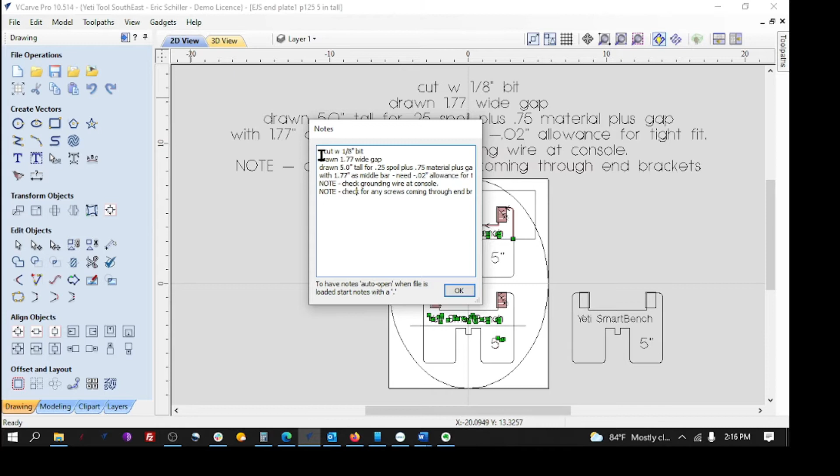Think of a shop where I may be doing the design work, but I may have somebody else pop open the drawing and toolpath it, or take the toolpaths that I've already determined and save them to the machine, and they're doing it separately from me, and I may not be there to talk to. So these pop-up notes are great. You just start the note section with a dot, a period in the first character space, and this will pop up automatically.

You may wonder what these are. These are the toolpath starts and stops. So if I come over to the toolpath side and turn off toolpaths, they're gone. So I often write a lot of extra information around here so that if somebody else is looking at the drawing, they can see what they want to do. So in this case, we're going to work with this.

This is one vector all the way around, and I want to take this and break it. I think what I did with Johnny, my customer, was I had done a line and broke it and things like that. None of that is necessary. So I'm going to work just from the finished setup. My 5 inches was measuring from here to here. So this is all one vector. I'm going to hit the right button and go to node mode, or I can hit N to go to node mode. I'm going to come in here, hit the right button, and cut the vector.

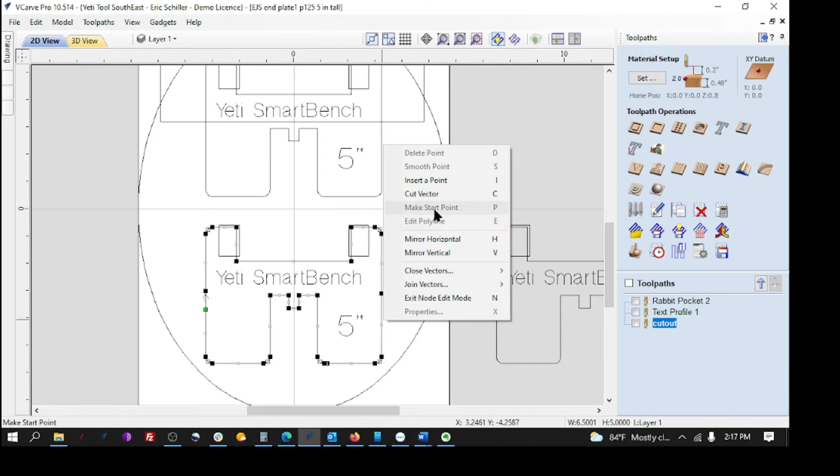And so now this has a different starting and end point. I'm going to come over to this side and hit, I don't care where, and cut the vector again. So now this is two different vectors, the one that does the top of it, and then the one that comes from this endpoint to this endpoint. Okay? So now what I want to do is I'll move the bottom of it a certain amount back down.

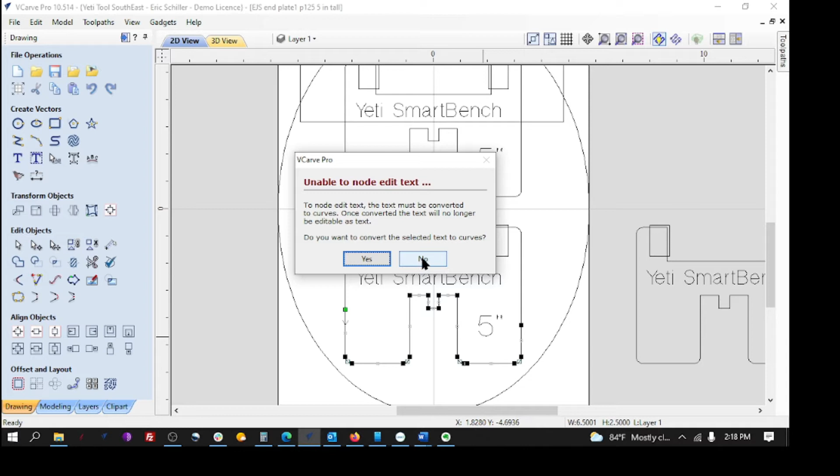I'm in the design side, so I need to be working over here. So I would go to the move command, which is transform objects, and then this is move selected objects. It's just that one lower vector. Actually, if I wanted to do this right, I could do this as well, but I'm going to get out of node mode. So I'm just going to hit the right button and close node mode by hitting N. So I want to take this text and this and move it in the Y direction -1 inch.

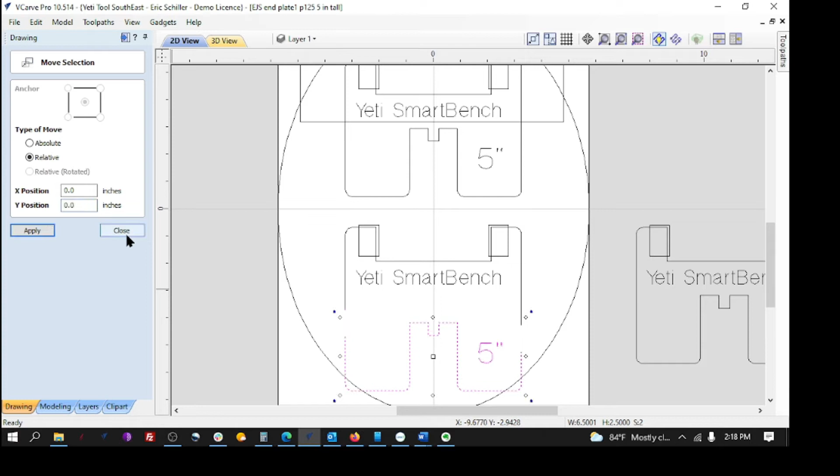So that drops it down, and then I'm going to go into node mode again. I can hit the right button and go to node mode, or once I have the vector selected, I can hit N, and I'm just going to take this and drag it up and drag it up, and then we would have to join those to make it one contiguous line. So if I select this vector and this vector, it's two different vectors, and after I work it out, it'll just be one, and that's what we want.

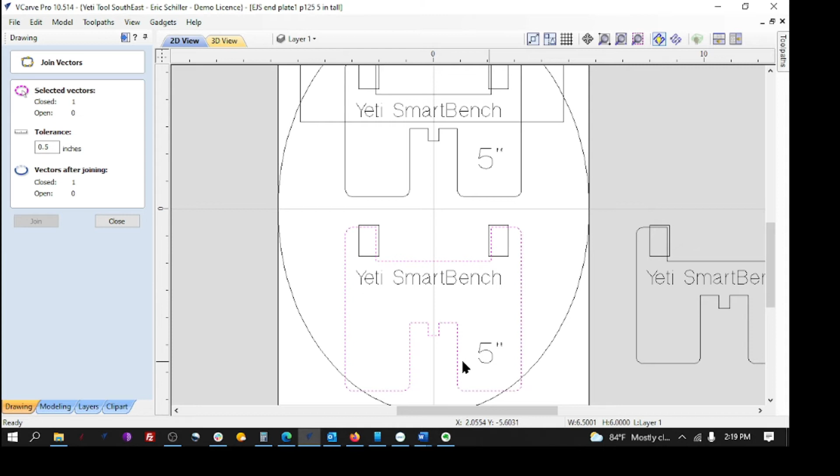Then I'm going to come in and edit the text. So that was 5 inches. I added an inch. Go to the text, and I'll change it to 6 inches. And there is my new size. I'll take this one, all of it, and delete it. I don't need this box either. I was probably showing another customer things.

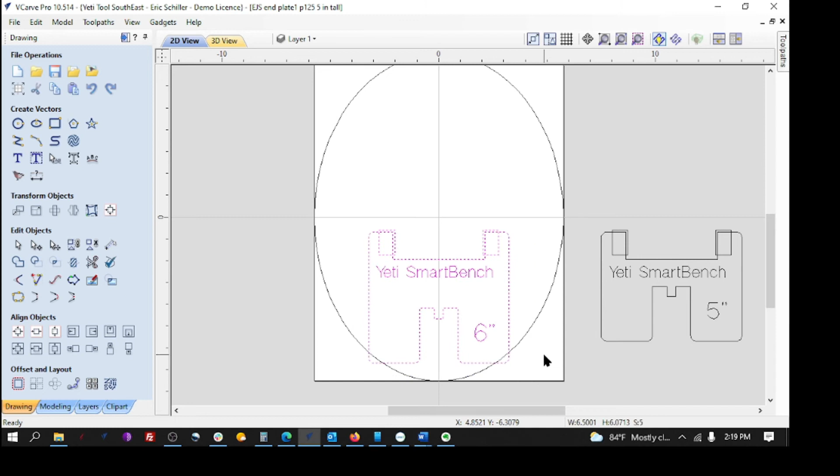So I'll take this one, I'm going to nudge it up with the arrow keys, and that'll fit. And I'll take this, all of it, and do Control-C to copy, Control-V to paste, and it pasted it right on top of itself, and then I'm going to move it up. Now, I had designed this with a 1/8 inch bit, so that will work.

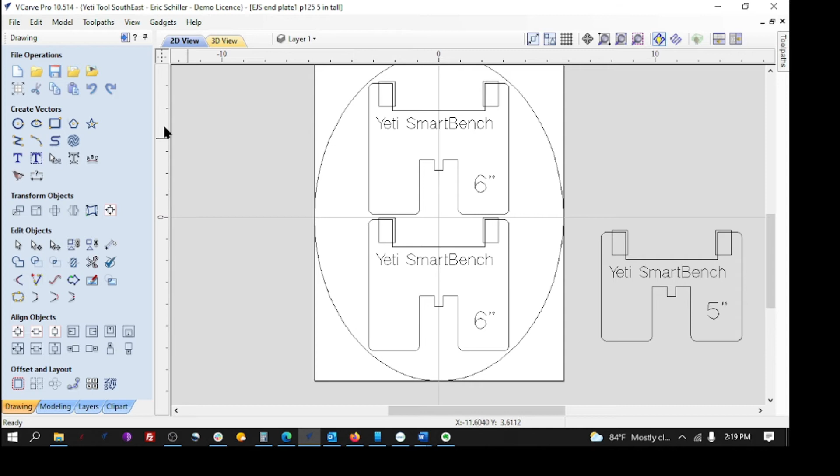It'll still pocket these out for the screw. There's a screw on my machine right here that this needs to be pocketed out a bit, and there we are. So then I would go to File, Save As, and give it a new file name, because rather than a 5 inch tall, it's now 6 inches tall. And save it and go back into the toolpathing and the rabbit for the pocket, and I'll just add that to the other pockets that I copied it, tell it OK, and calculate.

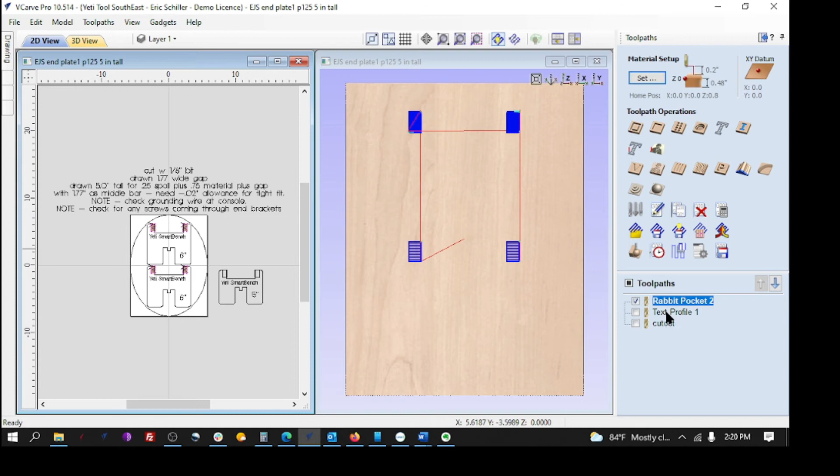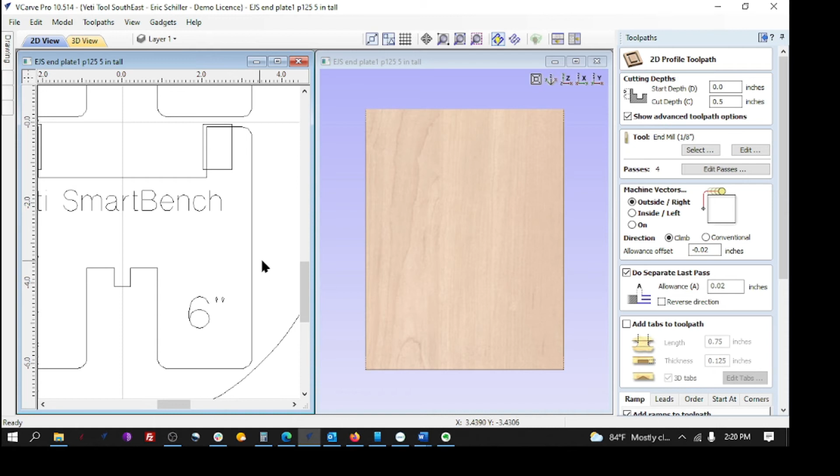And then I'll go to the next one, the text profile. That's for there and here and here, and calculate. And then the cutout itself. Click, click, and that is, sorry, I'm looking at what I've done here. Turn off. So the cutout itself, click, click. I don't know what I did. I may have turned it off by mistake. So there, now that's going to work.

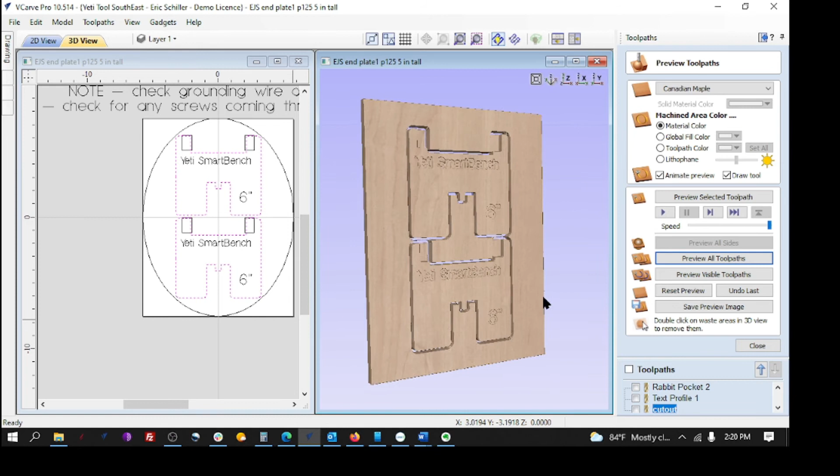And calculate. And it's warning us that it's going to punch through. My corian is 0.47 or 0.48. If I haven't surfaced my spoil board in a while and it may be standing a little proud, we're going to reset the preview, preview all, pocket, text, and there we go. Now, you'll probably want to add tabs to the profile cut, depending on how you're doing stuff, or you could be holding it down with CA glue and painter's tape. Again, how you machine this is all up to you, but this is a simple process.

Set up a variety of these. I probably have 6 or 7 different sizes, and I initially planned the 5-inch one for a 1/4-inch spoil board plus 3/4 material plus gap. That gave me roughly 5 inches. But I just have different sizes because sometimes my spoil board, I'll throw something on top of some scrap, so I may be using a 3/4-inch spoil board. Maybe not for the whole table, but just for what I'm working on top of, but I still don't want to roll on top of certain materials. So that's how you would do it.

Save it as, EJS or my initials, end plate with a .125 cutter, 5-inch tall, change it to 6 inches tall, and then you have that. Do another one, and then keep playing with it.

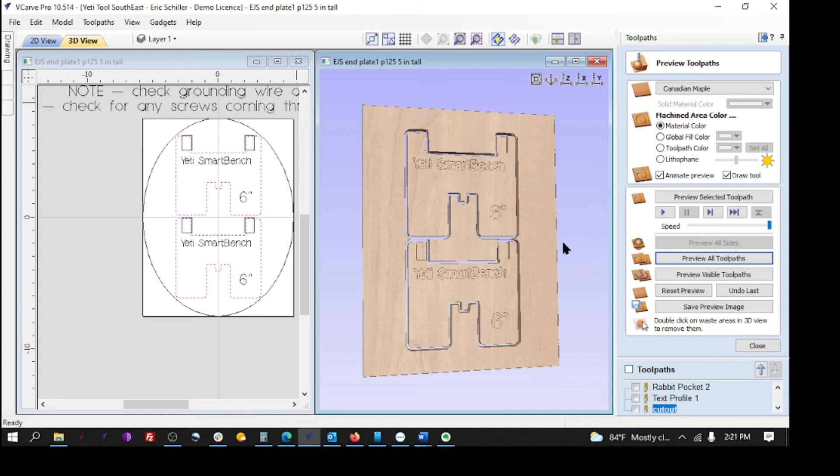This was all set to work with sink cutouts that I grabbed from one of the local cabinet shops near me. I bring pizza a couple times a quarter to them around 10 o'clock and load up the back of the Tahoe with all the corian I feel like taking that day. They don't like to have it hauled away because they pay for their dumpsters based on weight. So it's a nice relationship to have, and it works very well.

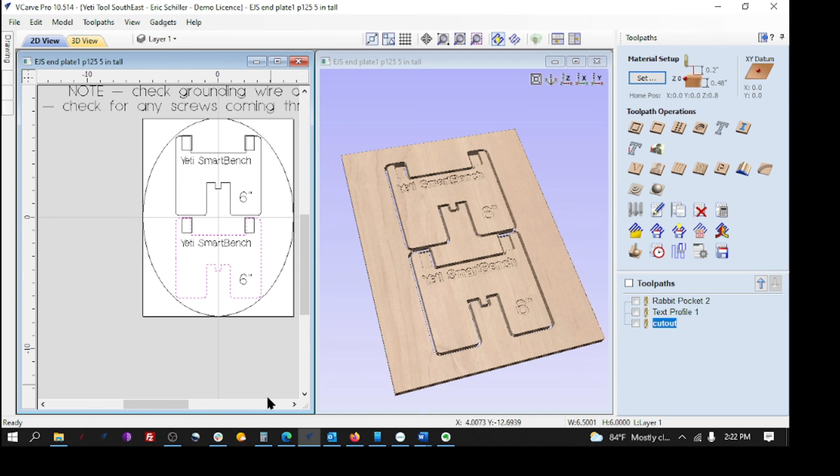So that's how you do it. You break the lines, move it a certain specified distance, rejoin, stretch the endpoints back to each other. They're going to snap, and then rejoin the lines so it's a single vector for the perimeter cutout, and off you go. So there it is. Pretty quick, pretty simple, and it should help you in a lot of different aspects when you're taking a file and you're not necessarily stretching it a certain size, a percentage. You want it to just pull apart.